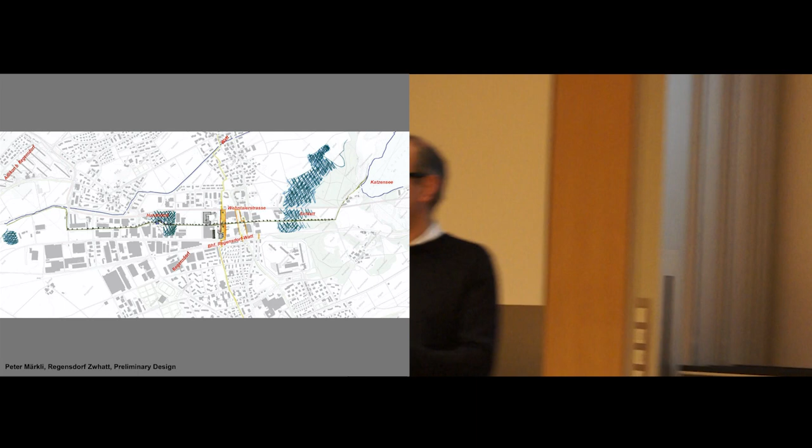Zwhatt, so we are in Regensdorf. Regensdorf is the fastest growing community in Switzerland. It's in the outskirts of Zurich, about a half hour train ride from Zurich main station. Regensdorf houses the biggest prison of Switzerland, which you can kind of see there, these buildings. This is where the really hardcore criminals are.

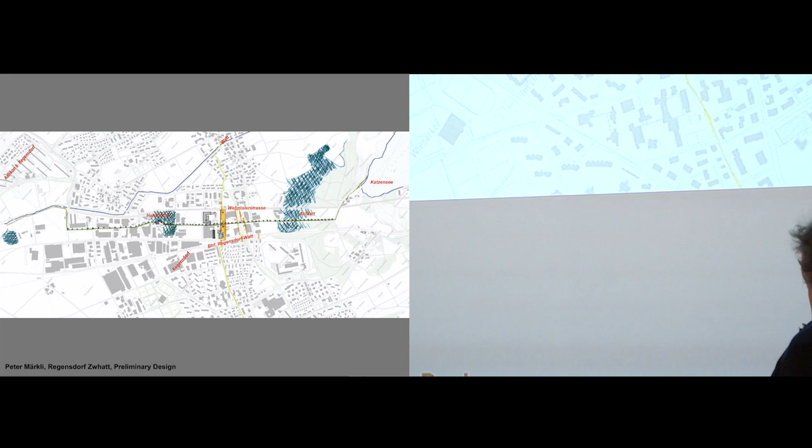Only men, murderers, child molesters. You can see it's mostly village structure. It has a big development from the 60s, a shopping mall with towers. A lot of industry that is about to disappear. And it used to be a green space, a gigantic swamp space, and there's only a few remnants left of that.

And this is a sketch by Peter Märkli, who actually did the master plan for the Zwhatt site. Maybe I have to explain the whole story of the Zwhatt site. Sure. Yeah. It's owned by the Pensimo. The Pensimo is the biggest pension fund in Switzerland.

They do the pensions for Swiss Airlines, for the canton of Zurich, for big industry companies. So they do a lot of investments in housing to get a revenue, and this revenue pays the pension of a lot of people who retire. They bought the site with a master plan that was big block buildings, all the same. And they thought, this is too far out, this is too big, this is all the same, this is not going to work. So they made a charrette.

They invited 5 urban planners and made a charrette, a kind of open competition to find the best solution in order to accommodate the diversity in use in different investment vessels, but also to kind of generate a good urban plan. So Peter Märkli won. And this is one of the sketches.

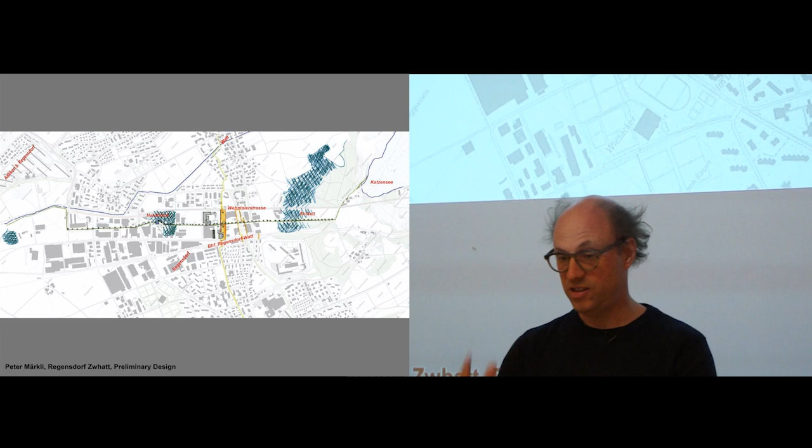This deals with the existing nature. To the right, you see the Katzensee and a remnant of the swampy area. This is called Schlatt. And then you see another one here, this scribble, it's called Harthölzli. And Zwhatt is in between Schlatt and Harthölzli, that's why it's called Zwhatt. Zwischen Schlatt und Harthölzli. So great marketing people. There's a lot of marketing in this project.

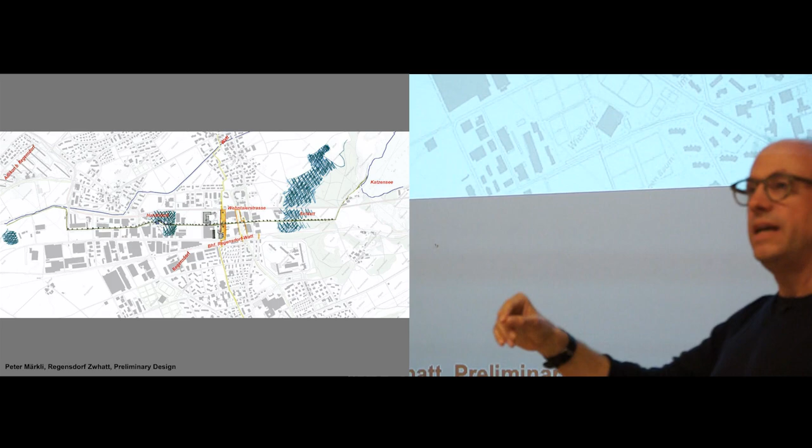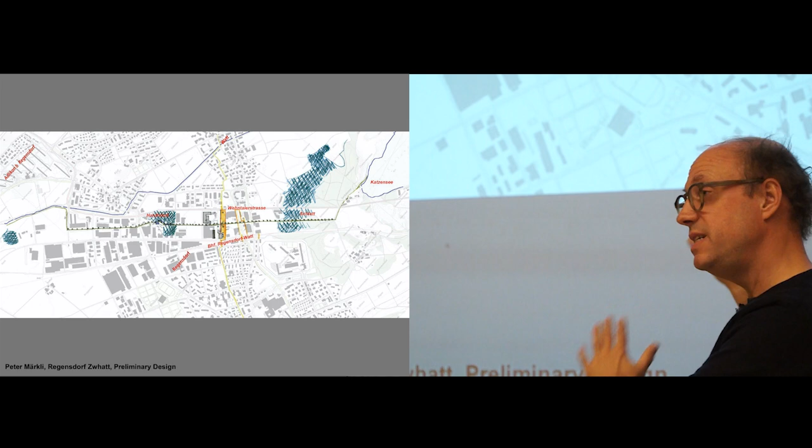Smart name. But for Peter, the idea that you could combine two nature spaces within an urban fabric was really important. And you see this line of trees, a big alley that runs through the whole site and connects those two. This is all privately or publicly owned land. Will probably never happen, but Peter is very persistent and he presents the same idea day in, day out. So let's wait for the trees.

So the central element of this area is this formerly industrial commercial area where there's a conglomerate of different existing buildings of different typologies. So instead of proposing a tabula rasa approach where all the buildings are torn down and replaced by a uniform kind of 7-story block structure, Peter Märkli developed a kind of mosaic system, a kind of compositional figure where he would combine different typologies to form a very heterogeneous whole.

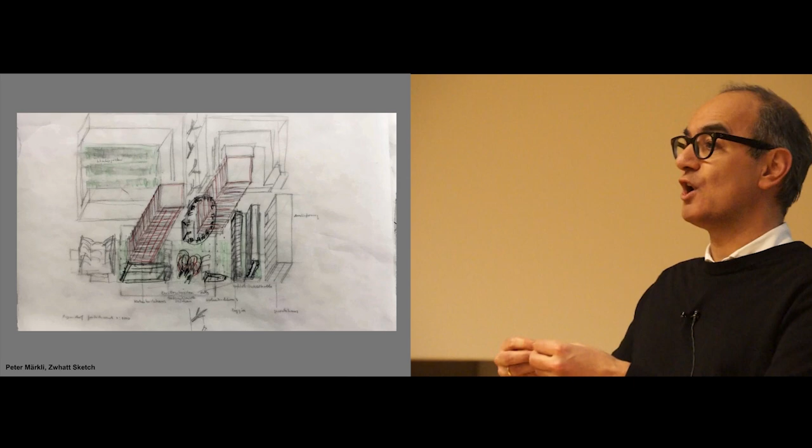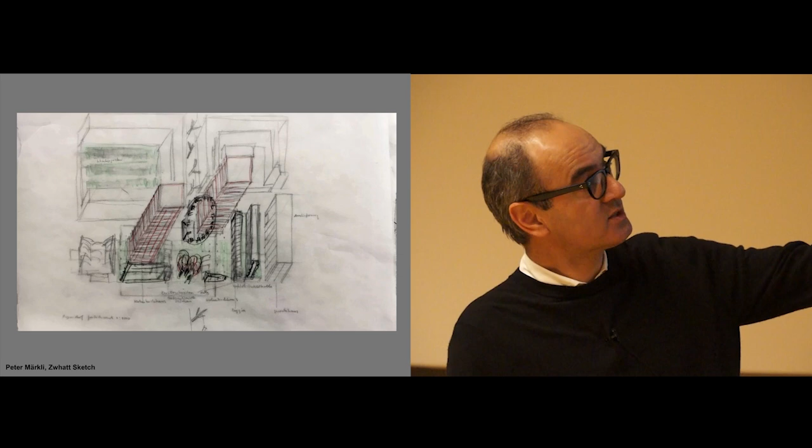So as you can see, the alley, the kind of longitudinal axis that Oliver talked about, is running from the bottom to the top, and in the center there's a widening space with a series of trees that form a kind of core space. This central space is flanked by two towers that create a kind of diagonal dynamic, and also framed by a series of parallel buildings to the right and a series of existing U-shaped block buildings to the top, plus a few small buildings and a few small structures.

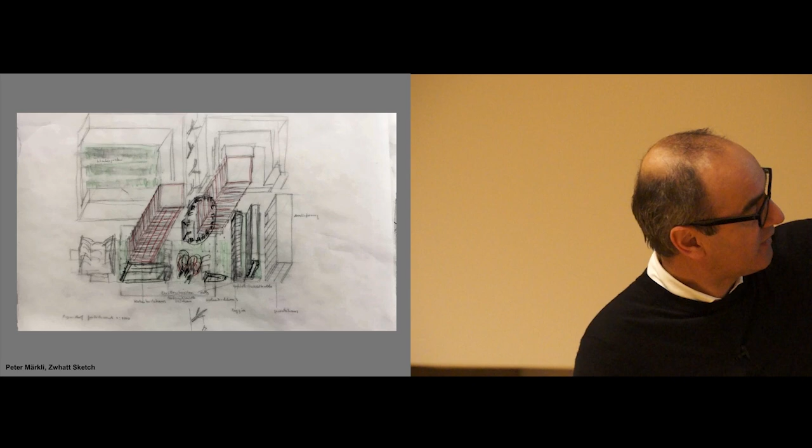You can see the little volume at the bottom of one tower. That is the building we are going to talk about in a minute, and a series of small pavilions, plus in the center a gigantic Ferris wheel that Peter imagined as the visual iconic celebration of this new neighborhood.

So we entered the game as the last players. Every field, every building had been decided through competitions or commissions. So we were left with that little volume here. Shall we go to the next image, Ollie?

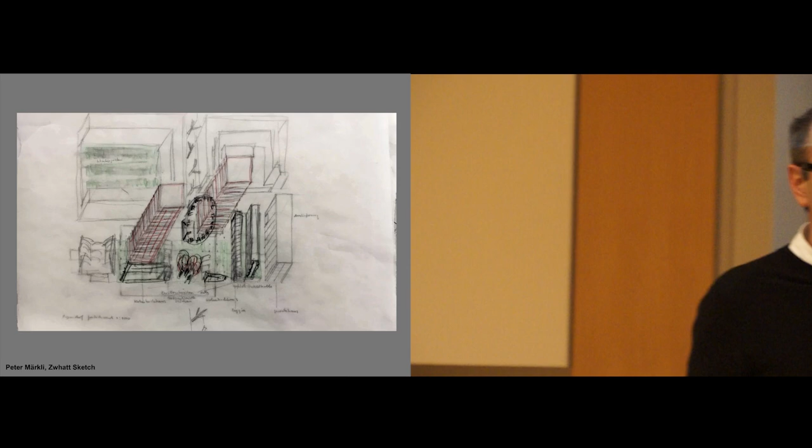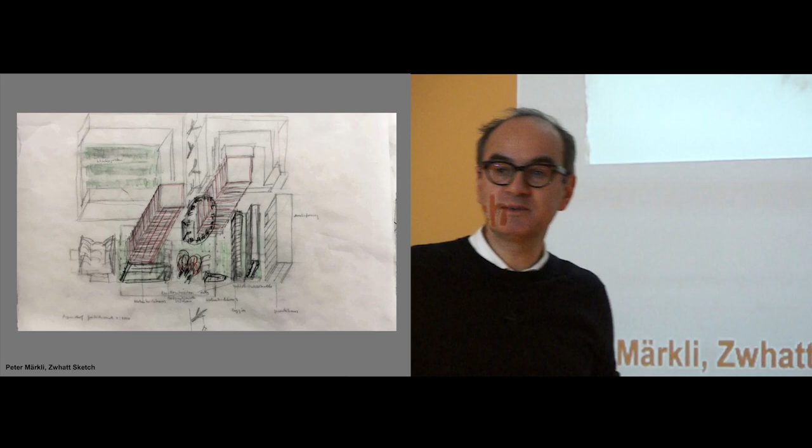No, the next is about sufficiency. Okay, so we have this. Do we have a pointer or something? No, never mind. You can see this little volume here, hovering at the foot of this tower.

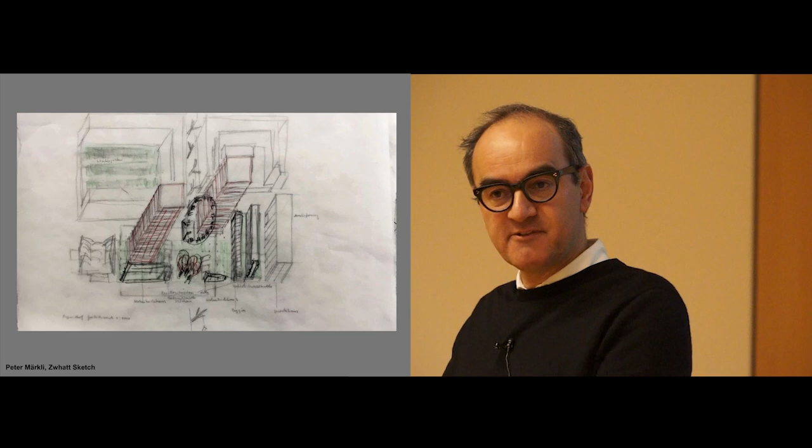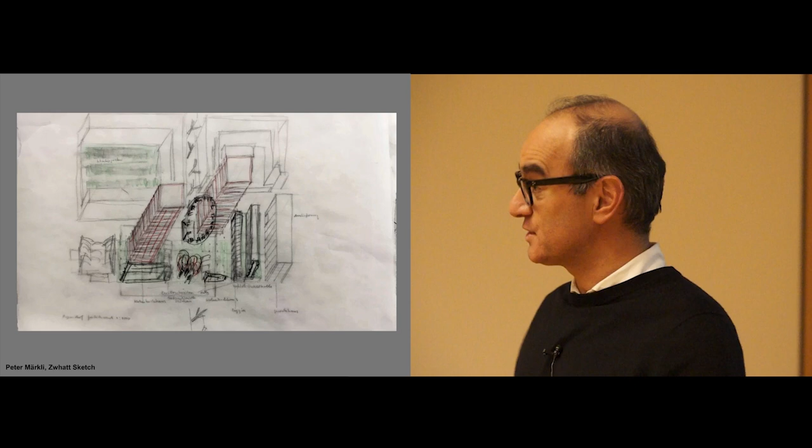And this competition was pitched as a sufficiency pitch. They invited, or you had to pre-qualify, and they shortlisted 10 architects together with general contractors.

And they said, we want to find out what is the cheapest way to construct an apartment building in Switzerland. They made a big market analysis and figured out that what you can always rent, no matter how the economy is doing, is small apartments at a very low price. For 1 to 2 person households, you will always be able to rent it and get revenue. So that was the program.

But instead of calling the pitch cheap building or maximum profit, they called it sufficiency. Sufficiency, as you all know, is a subcategory of sustainability. It's the part of sustainability that inverses the perspective on human needs and economics, from the idea that you should use as many resources as possible to fulfill your goals, to a reduction, a minimization, an economical thinking about the resources you actually need. Sufficiency comes from the Latin root, about what is sufficient, what is enough.

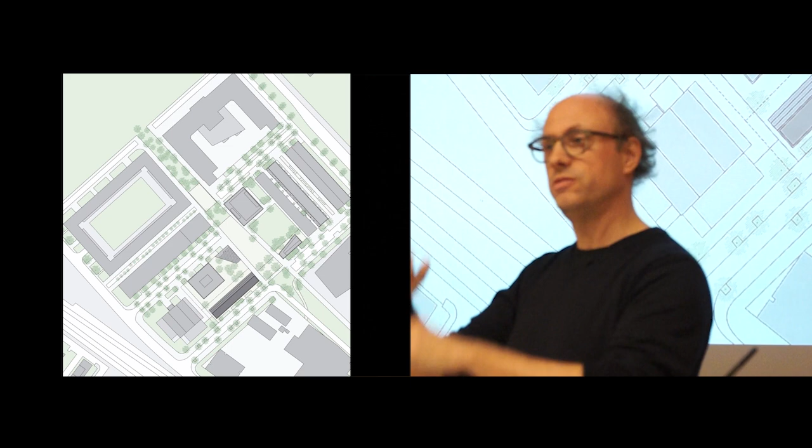So the program was 10 pages, very sufficient. The length of the building was given: it had to be 58 meters, and 22 meters high, because it's the noise barrier for the lower part of the Boltshauser Tower. Otherwise you could not have apartments in that tower - very bad for the profit.

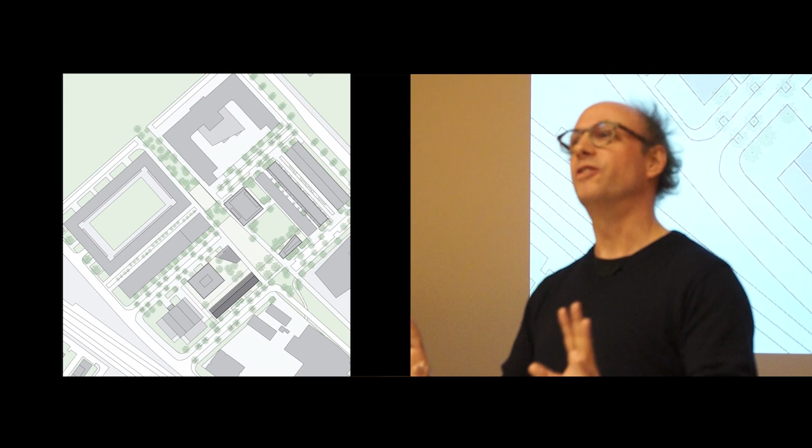And we talk maybe a bit juicy about the client, but actually it's a fantastic client, really wonderful. But yeah, come to that - it's always about relationships. The other thing was that there was a building mass assigned through the master plan by Peter Märkli.

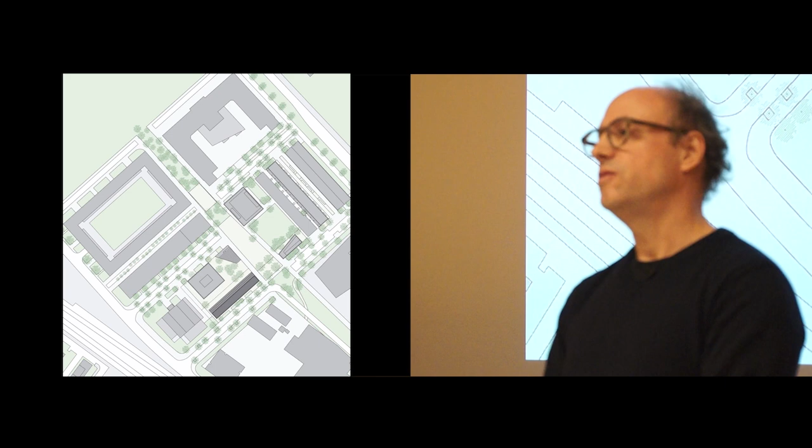They said 1 to 2 person households. They did not specify a number of apartments, did not specify a square meter range. They left that all very open, but they specified one very decisive factor: the cost per rentable square meter should be 2,500 Swiss francs, which is very, very low.

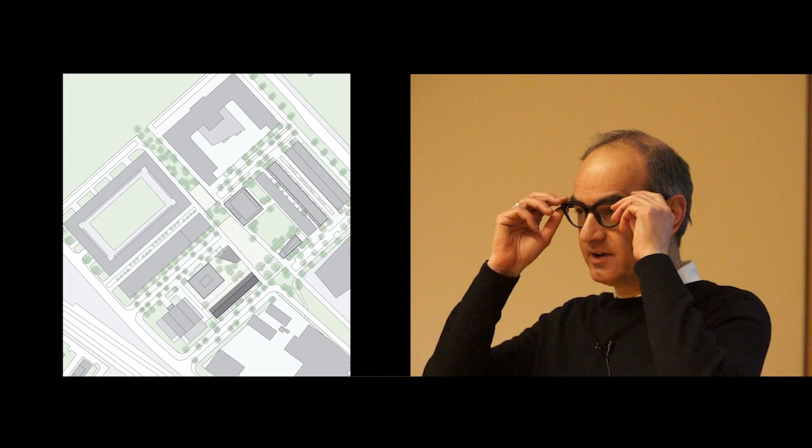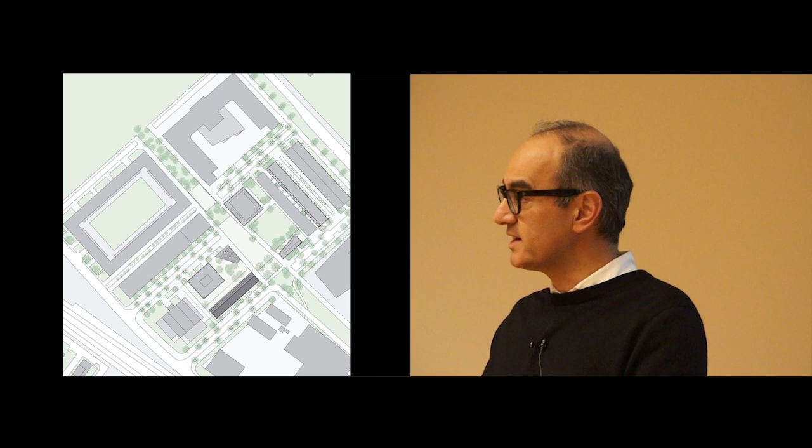So they asked us to team up with a general contractor during the competition - each team applied together with a general contractor. We applied with Anliker from Emmenbrücke, Lucerne, a traditional general contractor from the traditional massive construction business, while most of our other competitors were teaming up with more progressive wood builders. And so we did this project, which we will explain how it works.

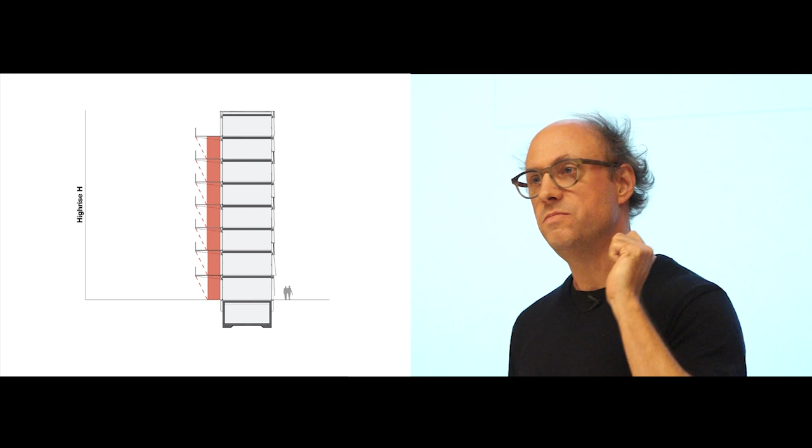So you start, right? Very simple. You have the length, you have the height, you have a mass, you get a volume. And if you want to have as much rentable square meters as possible, you try to avoid everything that takes out of the volume, right? So you try to avoid staircases because they count.

So it makes one staircase, maybe two for egress, and you have an open balcony access. You could make 8 floors in this building, so we made 8 floors, and what you end up with is a kind of hotel room, bathroom cell inside, balcony access, very depressing 8-story high American motel. In many countries this would be the standard cheapest way of building housing.

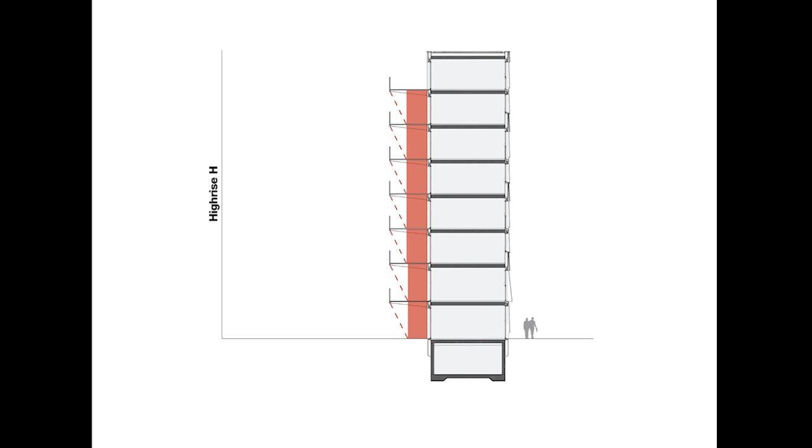And then we checked the building law, and we realized, oh, the cantilevering balconies, they're 3 meters deep. We need 1.80 meters as a kind of exterior to hang out. That was mandatory through the building law, plus 1.20 for the egress. So you have 3 meter deep balconies.

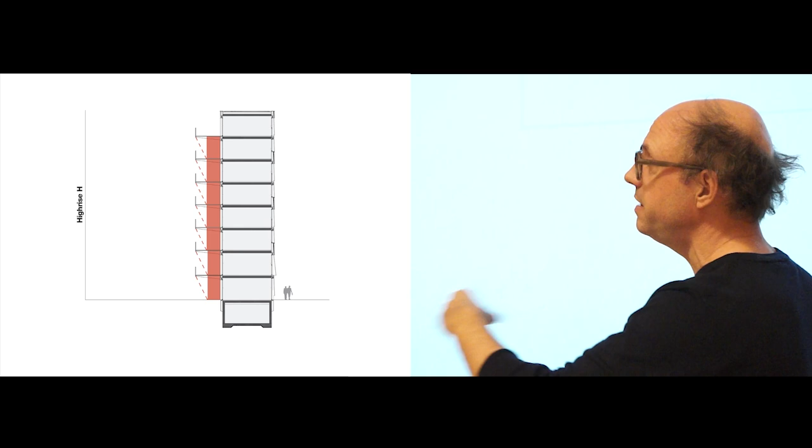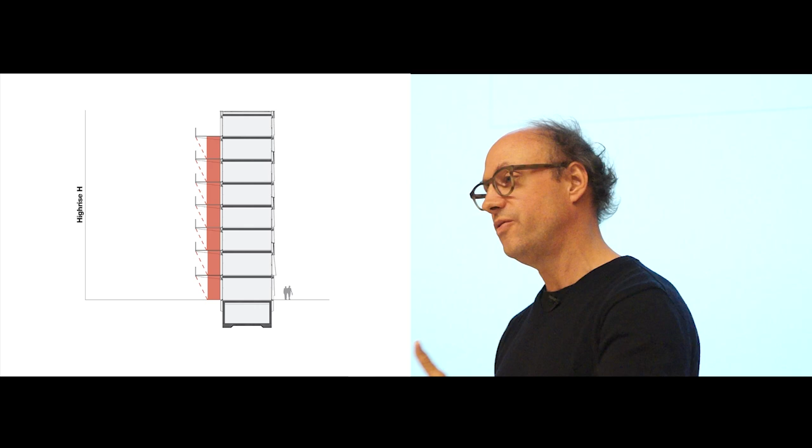They cantilever and they cast a virtual shadow. This is virtual, it casts a real shadow, but it's also a virtual shadow. And the virtual shadow, the volume of that counts. So you lose a lot of rentable surface. That's what the building law says. So you lose a volume equivalent to the red area. For the economic balance of this building, that would be terrible.

And then we realized, oh, if we leave out every other balcony, you reduce the red zone. Almost everything is in the building. And you end up with something that is a bit more than a hotel room because it's on 2 floors.

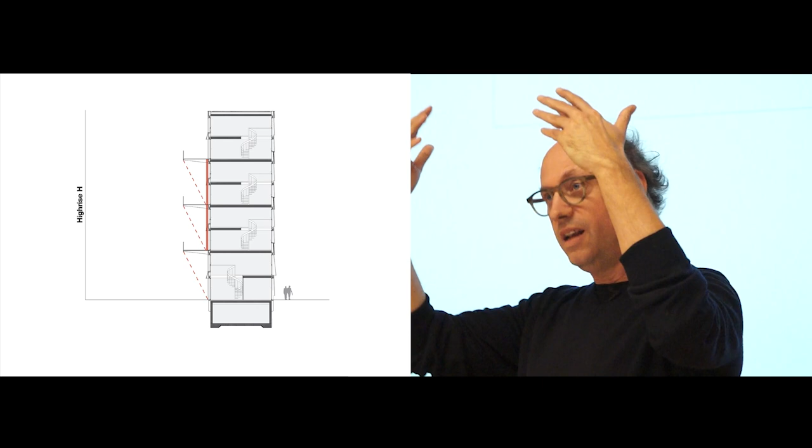And we kind of thought, oh, this is good, this leads somewhere, but we were not so happy with the 3 meter cantilevering balconies casting a lot of real shadow on the building. Plus, you see the line to the left, high-rise H.

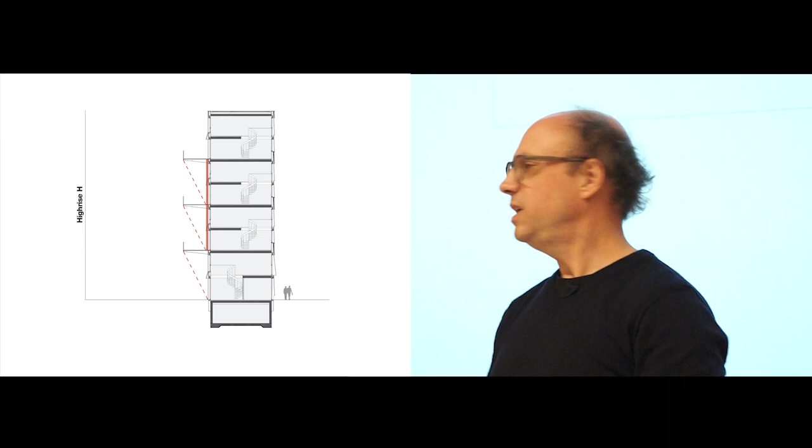This is Roger Boltshauser's tower. It's really very close. And, you know, this tower goes up, and you have an 8-floor high building, which is quite high, but you just look at the lower portion of that tower.

So, okay, we thought, if we step it, if we step it, we reduce not only the balconies that cantilever, get in more light, but also all of a sudden we have a building that's opening up towards the sky, looking up to the tower, and it's not a balcony building anymore, but a terrace building.

And you still see, we still have these kind of double height loft spaces in there because, okay, sufficiency, you don't need rooms for 1 to 2 people households.

You get an idea, a sense that you can use your apartment on the lower floor next to the balcony as a more public zone where people pass by and look in. But on the upper floor, you're actually very private.

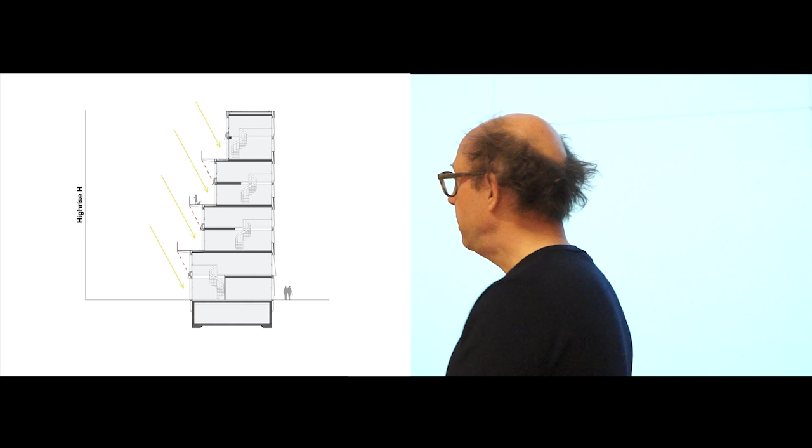And then we thought, to make it affordable, everything is the same bathroom, the same kitchen, the same staircase, the same hole. Sufficiency, leave away some ceiling. You get a nice double height space.

And so you get 4 times the same apartment, but in 4 different sizes. These apartments are like T-shirts. You get them in small, medium, large, and extra-large.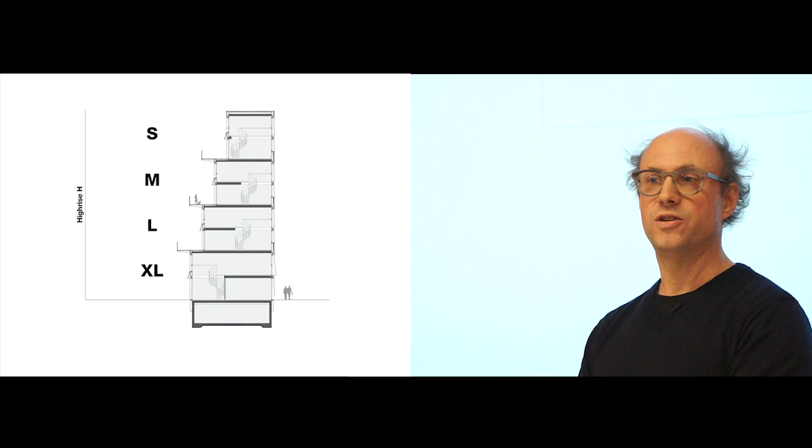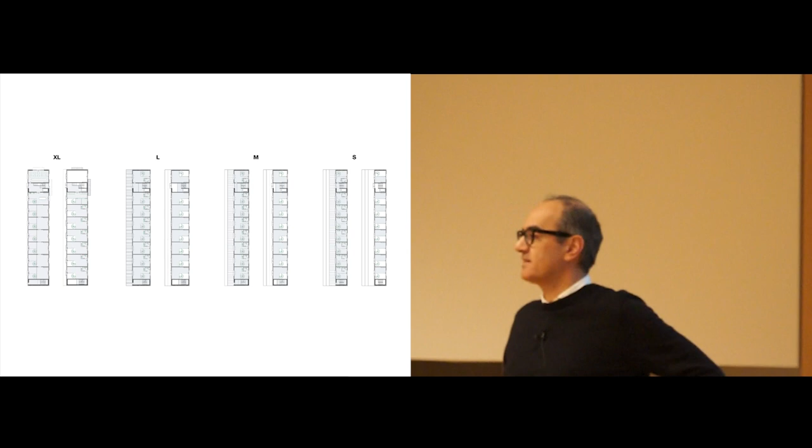And also you end up with a very repetitive structure. The plan is basically, this is basically the first building we designed that has no plan. There's no ground plan. It's a repetitive structure where you can see that there's one main staircase on the top and another egress staircase on the bottom.

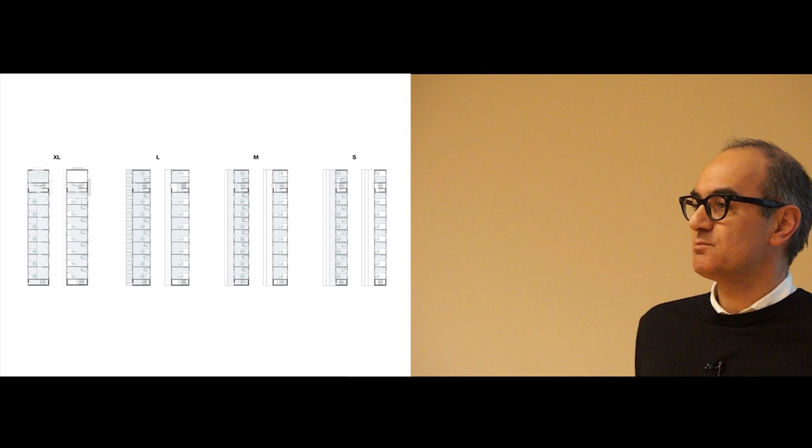And then it's just a series of parallel walls that are wide enough in theory to accommodate 2 rooms, 2 room access, even though we decided not to have any internal separations and not to have any internal rooms. And as you can see from the left to the right, the building just becomes thinner and thinner.

We have been working on housing for the last 17 years, mostly in Zurich, and there has been an excess of complicated floor plans, ever more complicated.

We talked about the kind of Milanese inspiration that kind of got into Zurich and that created an organic overabundance of really, really complex spatial configurations that somehow all were based on the same assumption of a kind of late bourgeois lifestyle. And that were all based on the idea that every year we could add a few square meters to housing and that the money would just flow and flow.

So we try to say this would be the end of the plan.

We have to shed a lot of weight and leave a lot of assumptions behind in order to get to a place where we can really create affordable housing.

From the beginning, we were annoyed with the dominance of the plan, annoyed that competitions were decided on the plan and just on the plan. Urbanism almost did not exist. You make a very beautiful apartment, multiply it around the stair core, get a building, multiply the building, and you have the same bad settlements we've had since modernism, with green spaces in between. So from the beginning we tried to counter that by thinking of urban space, of the expression of buildings, how they relate to different contexts.

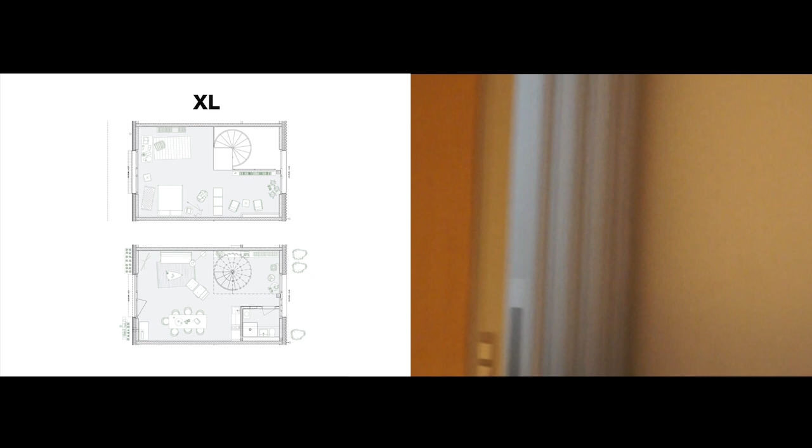I'm going to guide you through the apartments. This is the X-large, obviously the biggest one. These apartments did not specify the size, so you can make an X-large that's more than 90 square meters, but just for 2 people.

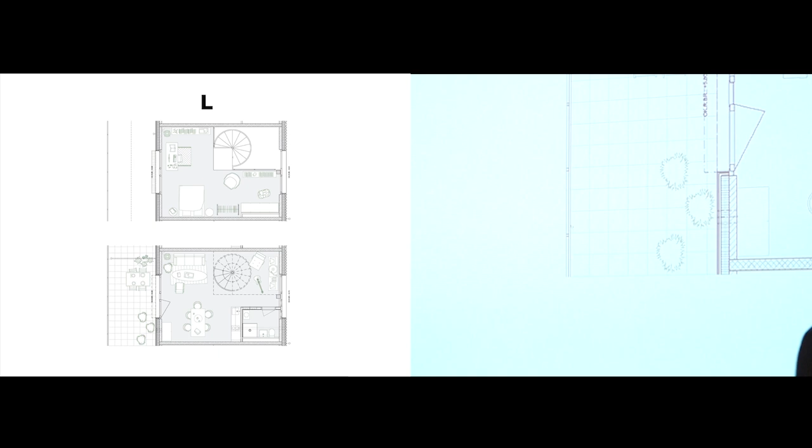The large is around 75 square meters. What you can see in both plans, on both floors, there are 3 spatial zones. You enter from the balcony—there's one spatial zone here, there's one there with the furniture of a living room, and then there's the double-height room occupied by the staircase, but there's plenty of space under the staircase as well—that's the third zone. Same with the L on top, and you can see how it's furnished, how you could use it, but it does not prescribe where you have what.

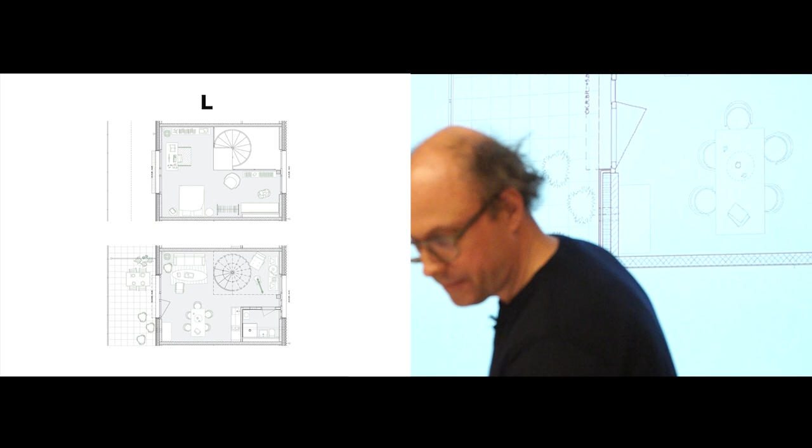This idea to reduce the necessity to the max—it's quite an ambiguous expression. We were fighting over the title, whether we should use that title, 'reduced to the max,' in this presentation for you.

It was invented for the first commercials of Smart, the car. I thought it was Nike. No, it's Smart—felt slightly embarrassed for Smart, right? Yeah, but Nike would be cool.

Anyway, we were fighting about what it means to reduce to the max. It reminds me of when I was a student—architectural minimalism was claiming there was a maximum excess of money and form used to suppress all detail, creating a kind of abstract architecture that would still be very luxurious and extremely expensive.

We wanted to do the opposite. We wanted to take every element of the building, interrogate it, question it for its performance, its material, and its character, and then put it back into the building, but also allow each element of the building to speak. We're often confronted with apartments that are white and uniform. We wanted the building elements and the way the building is built to actually be expressed, and translate that into a promise of freedom, maybe.

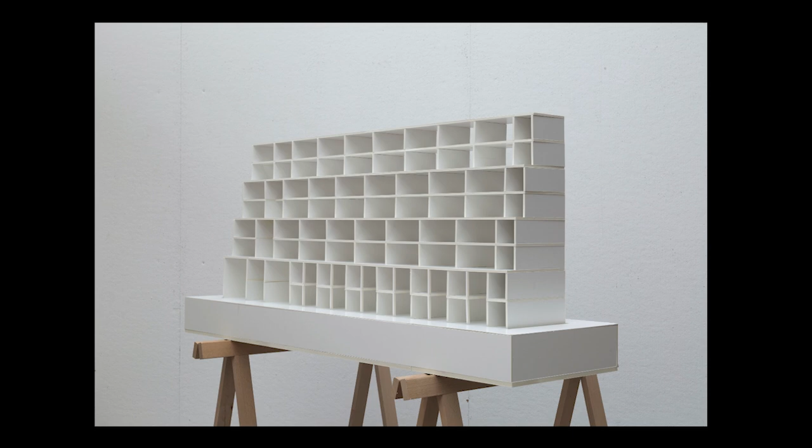So this is the structure of the building. This is a 1:50 model—we always build models at 1:50, and this shows the structure but also shows our design process. The moment we know how the building's going to look, we build a model like this, where we build all the interior walls, the envelope, a base, and then we start working on the facade. You can see this doesn't really prescribe how to do the facade.

Facades usually don't come from plans, but if you have no plan, you have even less to hold on to. You need an idea for a facade, you need to have your own idea. So you can see what happened here.

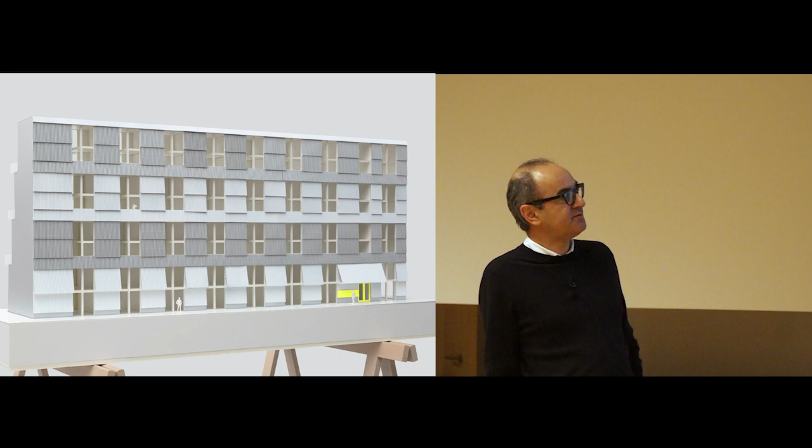This is the street facade, which is flat. It's covering 8 floors, but it takes the idea of combining 2 floors into one gigantic window. Behind this window there's both the double height space and portions of the 2 spaces on the ground floor and on the top floor. By combining these floors into one expression, we are using something similar to the classical idea of the colossal order, where in classical architecture you would say, no, I'm not expressing each singular story, but I'm unifying through visual elements one or more stories into one visual entity.

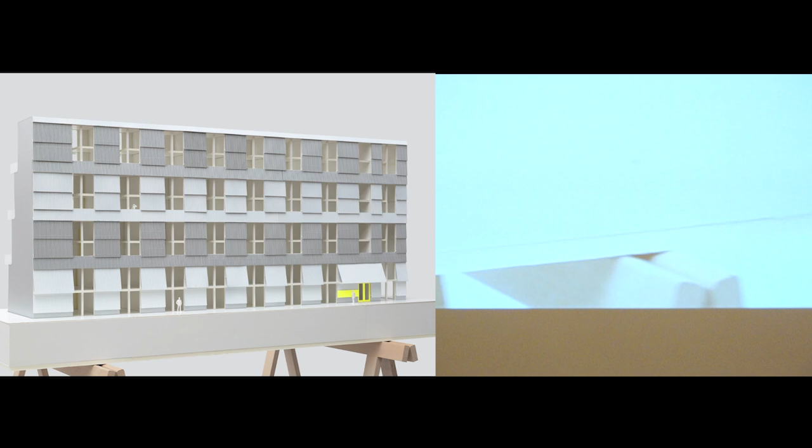The other reason why we did that was the David and Goliath problem. The huge tower of Roger Boltshauser looming behind, and the big tower of Peter Markli next to it, meant that we had to put our chest out, like Danny DeVito and Arnold Schwarzenegger in that movie from the 80s - maybe you can Google it - where the small Danny DeVito wants to stand up to the big Arnold. So we had to orchestrate a relationship between small and big, between a calm volume of the tower and the figurative quality and energy of our small building. It also speaks about the relation of size and scale in architecture - something small in size can be large in scale. This is what we tried to do.

The other side is green - this is the garden side. The site development is very fancy landscape architecture, very green. It's not a hardcore tarmac urban space, but actually very lush, with gravel, trees, and things. So we tried to show there's a difference on the balcony side in this green, but also in terms of contrast to the red towers.

You remember the very first sketch, the dark, tasteful red two towers, the twin towers. We wanted to be a bit less tasteful and use a color that is more in between pop culture and industrial color - maybe American cars or soft ice or something. And we also let the reddishness of the towers be stronger. It's a question of autonomy - if two things are autonomous, confronting each other, maybe there is even more of a dialogue than if one tries to mimic the other or do the other a favor. We certainly did not try to do favors.

As you can see in that facade, the typology of the double height unit translates almost into something like a row house. Every inhabitant has their own kind of front yard where they can put furniture. They have an entrance, a window entrance area on the lower floor, and windows on the upper floor. So there's this memory of the row house and a kind of street in the air.

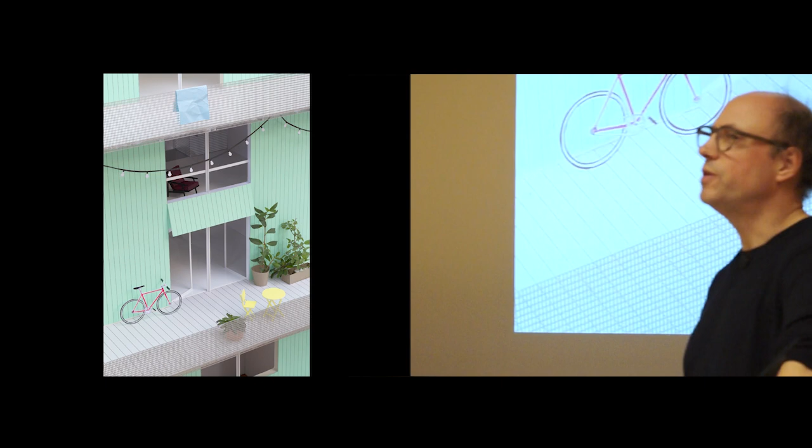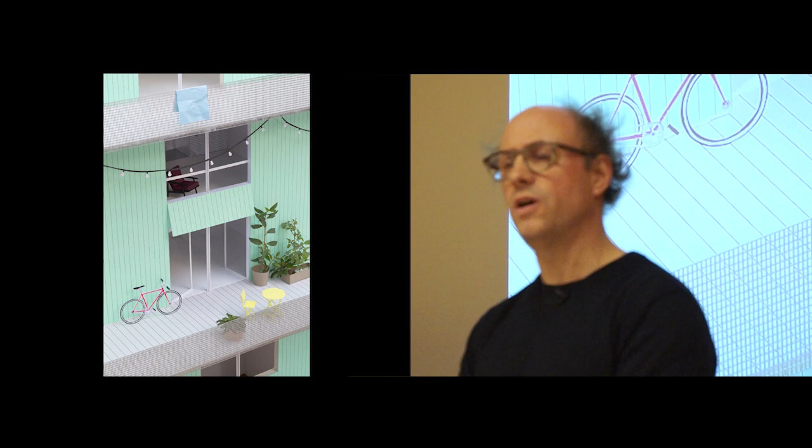And this last image from the competition shows the view from the tower on our building, the view from these luxurious apartments. The tower, by the way, is the first apartment high-rise building in Switzerland constructed in load-bearing wood columns and beams. Fantastic. It has very muscular ceilings, a sprinkler system. It's very special, very fancy as well.

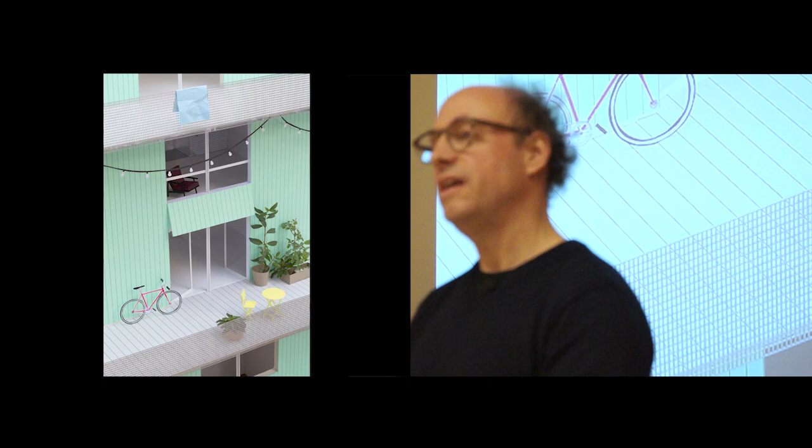And we knew that, and our ambition was, if you make the cheapest apartment building in Zurich or in Switzerland, can you at least give something so that the people from the tower look down and say, oh, actually life down there is pretty cool too, and actually more fun. We imagine those young bankers who can pay a lot of rent live in the tower, and they look down to those poorer people down there who enjoy themselves with the beer and the sun, and they're like, oh no, I would like to be there.

And so then with this whole scheme was developed together with the general contractor. It was actually quite wonderful, the collaboration. We had plenty of meetings together, and then they had to give an offer. And on the last day of the competition, they sent us the calculation of the whole building, and we looked at the fee. Fee was 500,000. We thought that works - building costs 5 to 6 million, 500,000 architecture fee is fair, it's okay. And we managed to have that price, the 2,500 per square meter, and then we won the competition.

Because all the other schemes, they kind of stayed on the level of the 8th-floor motel. Some had a bit more balconies on both sides, and some did a bit of construction where the inhabitants should construct the building themselves, which was not appreciated by the client, because they said, my God, we're a pension fund, we're not a cooperative, how the hell are we going to construct an 8th-floor building?

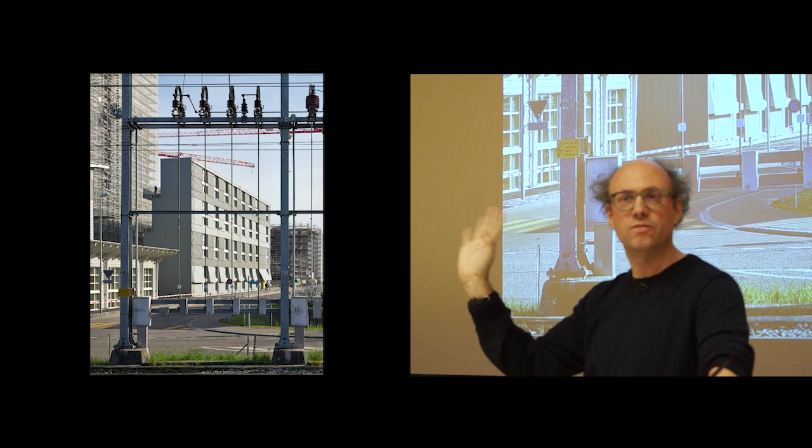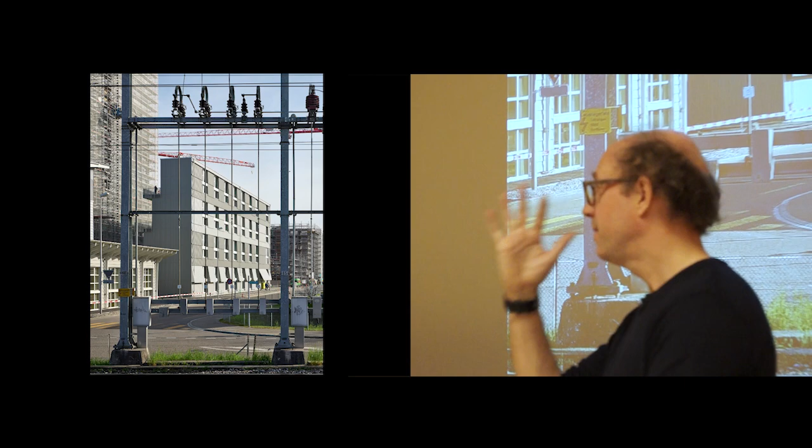So to plan this building, we thought, great, we go in with the general contractor, they know how to make the cheapest building. Very simple, it's also a simple building. Experts, that's also what clients always think, that general contractors are experts. They were great, but they had no clue how to do it. Not to bash them, but it was really, really interesting.

When we met with them like 5, 6, 7 times during the design process, even during the competition phase, each time we were showing alternatives to the very traditional way of doing an efficient construction, and they were out of their field of comfort and couldn't find the answers. You have to imagine that the way buildings are built in this country and in Europe in general is really efficient from a certain point of view of construction. But once you leave that standard construction procedure, suddenly everybody is out there in the field of the unknown. And that was so fascinating.

The gravitation towards a standard way of building was so strong that we needed a lot of energy to depart from that. So we basically, in our minds, took the building apart. Every element, every wall, every material, we looked at in terms of cost, performance, durability, but not only this. We had to look at how it's constructed. How many days is the crane, the machine, standing? How long is it? How much is the rent for the crane to stand?

Or even further, if we thought about prefab ceiling elements in concrete, that would be great because you can build really fast. But it turned out that in this small country, in Switzerland, there are only 2 companies that produce them. So the market doesn't play, so you don't get a cheap price. So it was out. So the entire building process was part of this thinking about the price and the kind of optimization of the project.

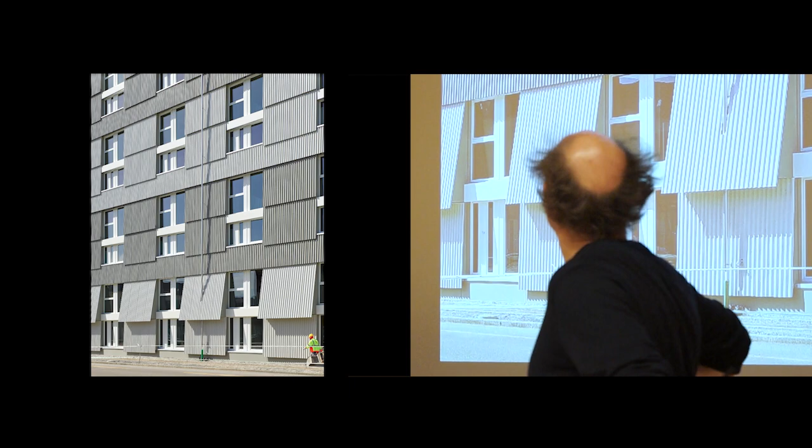That's the only reuse we have. They are next to a paper factory, and they use a lot of the trash of the paper factory, mix it with cement and glass fibers from China, instead of asbestos, to manufacture these things. But everything is just next to them, the cement and the paper trash. It's also a very light material, so you don't need a lot of structural reinforcement.

You kind of see the tower in the construction in the back, but you actually also see that it looks like a 4-story building, and depending on light, the two colors play out much stronger or become a bit more unified.

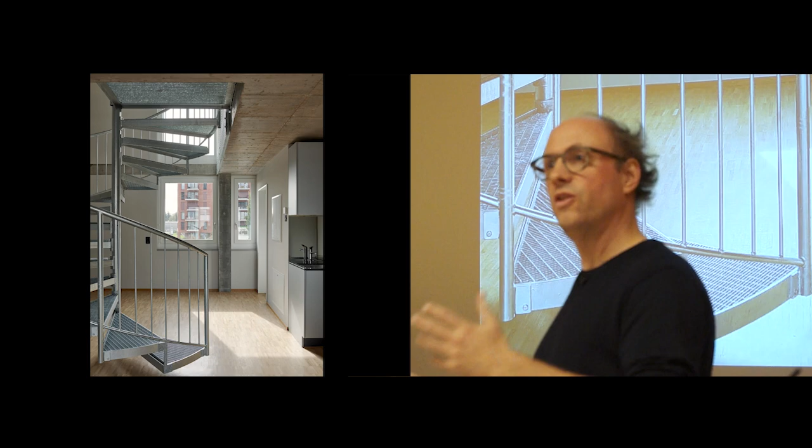The people next door are physicists, students. It's their first apartment that they have together. It's all IKEA furniture plus big gaming computers, not because they game, but because they're physicists, they need calculation power. And it's equally nice. People were tinkering with the kitchen because it has just four elements, so they constructed their own things. The physicist made a big kitchen island instead of a table, and the table is next to it. You don't need an Eames chair to move in.

I would say in a Valerio Olgiati building, if you have IKEA furniture, it's a real problem. And John Pawson gave a lecture at ETH when I was a student, showing his super minimal flat. He said, and then it was Christmas, and we bought a Christmas tree, and the Christmas tree looked really bad. And then I realized there could be a problem with my work.

This is the S apartment. You can see how literally the staircase moves towards the facade. The main staircase, the elevator, there's one elevator. It's as big so that you can bring your bicycle up.

And then there are the post boxes. Post boxes, and I wanted to talk about the flaps, Thomas.

The facade, as you saw, there are flat pieces in the facade, and then there are places where the Eternit is tilted out. It becomes very volumetric. It's a great plasticity to it.

As we said, it's very thin. The Eternit is, I think, 6 millimeters, so it's a surface, it's a cladding. But the way we use it in this building is sometimes you tilt it out, as you can see here, or maybe see it better in this one. It's held out of the facade to cast a shadow, whereas on the inside it's very flat. So this is about visual moments, about uniting several plates, because the plates are that wide, into one big piece. This has nothing to do with construction, this has only to do with architecture. It's about the scale, it's about plasticity, it's about light and shadow.

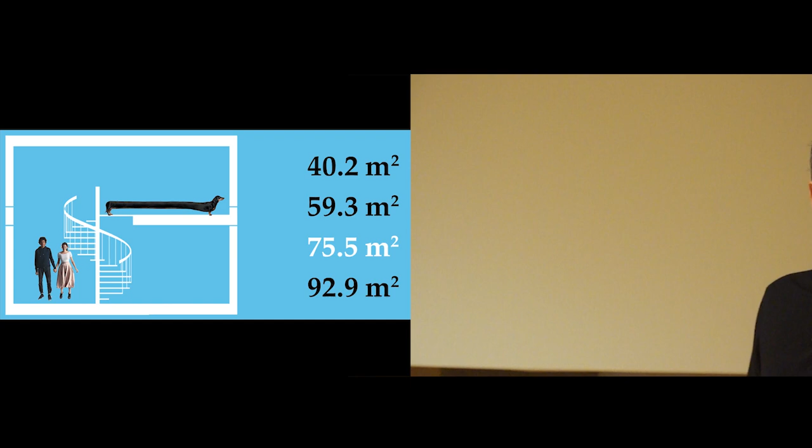Hang on, hang on. Let's first talk about the construct of everything. Yeah, the construct of it. So this is the marketing.

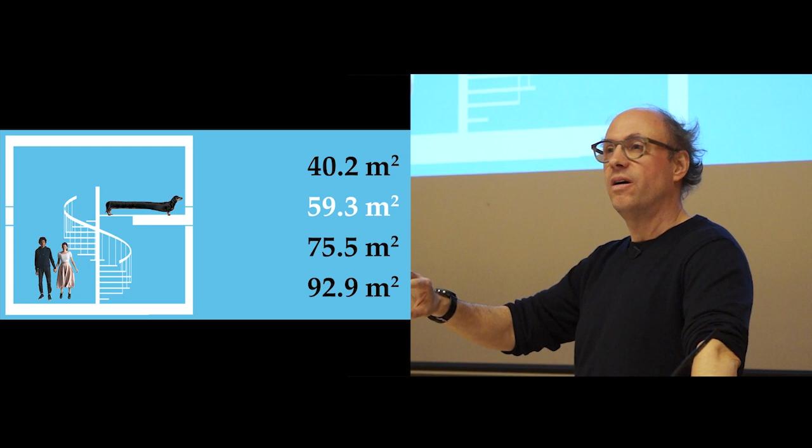And this slide is specifically for Nina the dog, who's in the front row. Thank you for coming. There was an insane amount of marketing. They had 3 marketing offices that changed during the construction of the building. So this is kind of a preliminary thing, but it was the cutest that they did.

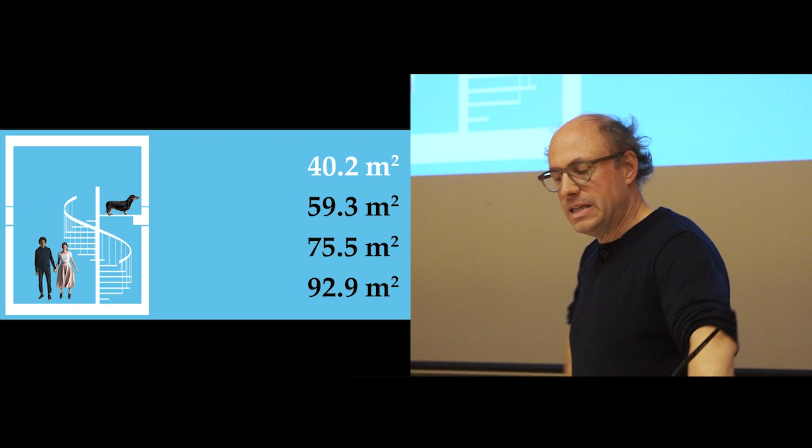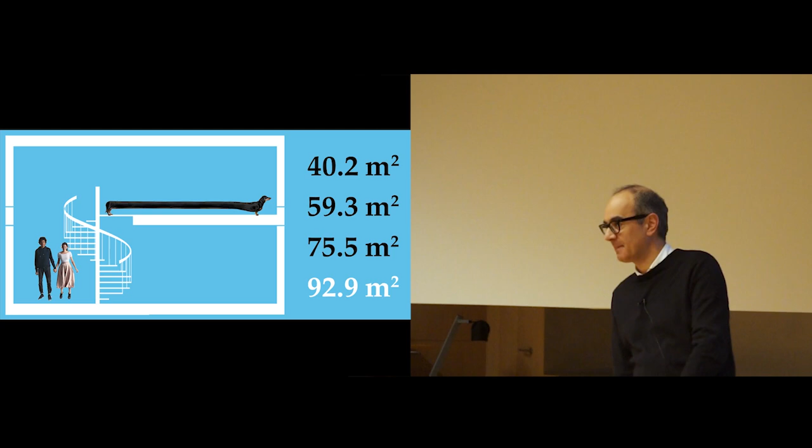There's a gigantic website. They did 2 films so far over the whole site. They're going to publish a book. They had artists. They buried a whole museum grave under our building. And we were always the guys with the smallest fee. The low-cost guys made a cool project, but actually we did not profit. The graphic designers are from Paris, like for the whole signage, everything is very, very fancy.

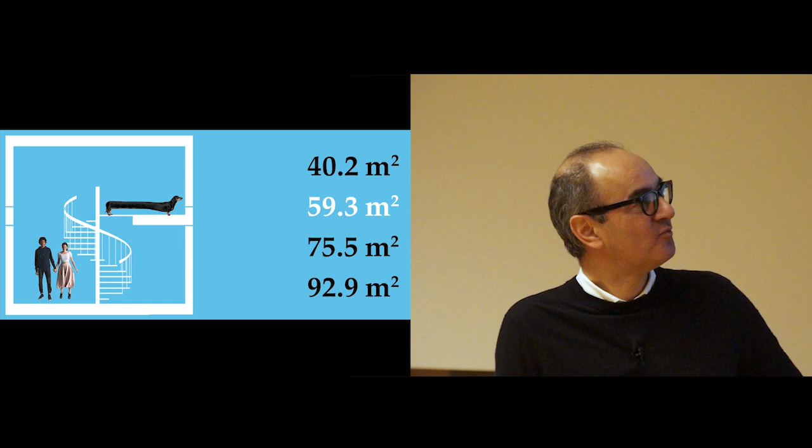And then I'm just going to go back because otherwise you're going to get sick. And then the month before we finished the building, they went on the market. And the week before, we asked them, so how much are the apartments going to be?